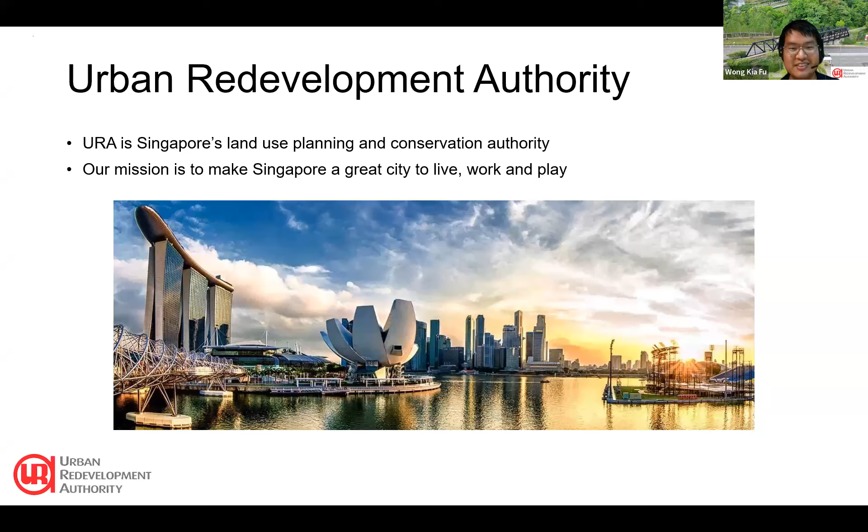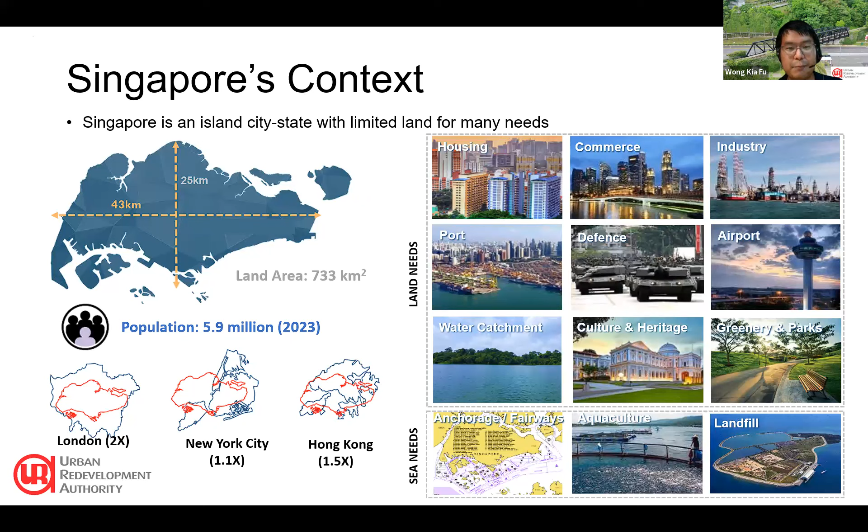Singapore is an island city-state with limited land for many needs. We have a population of about 5.9 million this year, within a land area of 733 kilometers square. We are half of London, and Hong Kong is about 1.5 times Singapore's land area. Within this very confined land area, we have to meet various needs as a city and as a country. Therefore, places like ports, defense, water catchment, greeneries, and so on all have to be considered in the limited land. We have to plan carefully and reuse and adapt different places to meet our needs as a country and as a city.

From the Development Services Group within URA, we are the engineering arm of the URA, where we plan, facilitate, and implement infrastructure, environmental improvement, and building projects for selected areas to facilitate URA's plans and vision for the city. Some of the more recent and well-known projects our team has completed are the district cooling system in Marina Bay, which has the world's largest underground district cooling network at the moment, the Helix Bridge and Marina Promenade, Kranji Marshes, and Marina South, just beside Gardens by the Bay, where we are starting to develop this place to serve our future needs.

We also do environmental improvement projects. For example, this one, where we upgrade an existing underpass to make it more friendly to people of different ages, avoiding the need to cross a pedestrian overhead bridge, so that it's more convenient, especially for people who are on wheelchairs and those who wish to cycle with undisrupted flow from different parks into the city area.

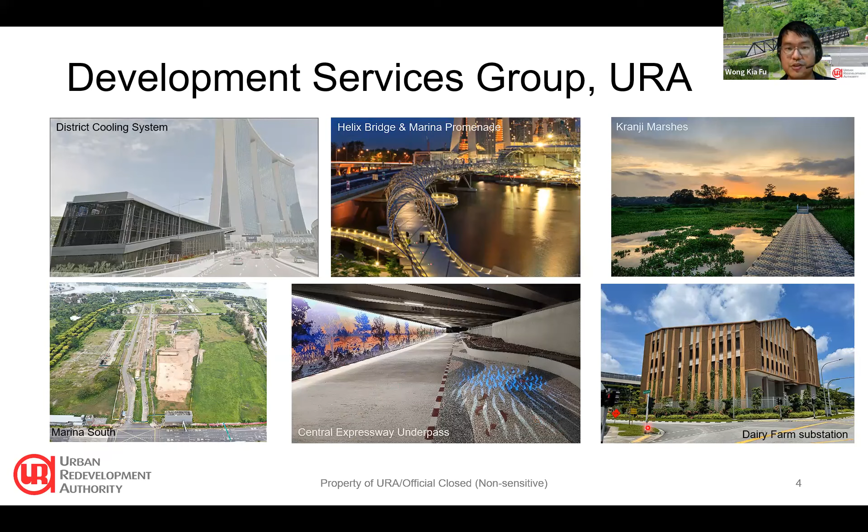And last but not least, as we develop new areas, we also work on preparing the infrastructure, for example, sewers, drainage, roads, as well as substations to serve the area.

So allow me to do a very brief introduction of the rail corridor and the railway history of Singapore. The alignment that you see here joins from Woodlands all the way to the Tanjong Pagar and Pasir Panjang area. This old alignment was the first Singapore Kranji railway line.

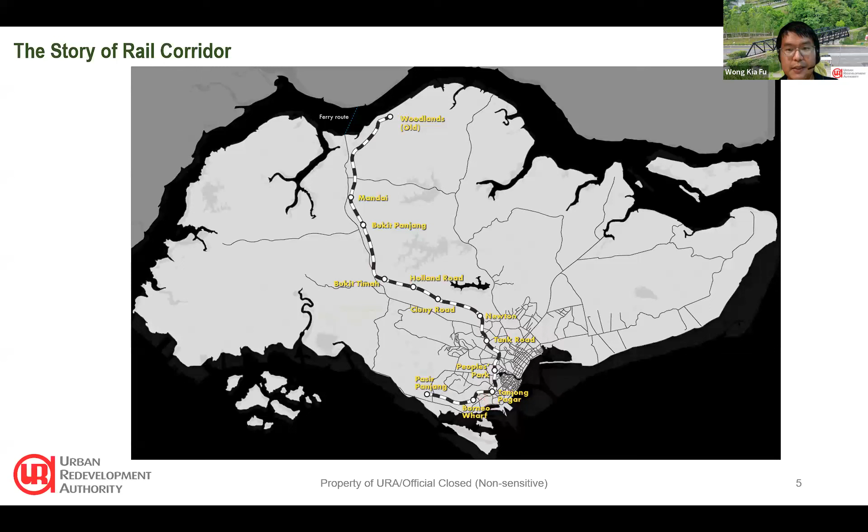This alignment, especially from Bukit Timah to Tanjong Pagar, was prone to flooding back then, and it was subsequently realigned in 1932. At the same period, due to the need to expand the main terminal in Singapore to cope with the influx of passenger and goods, the Tank Road station, which was the previous station, could not cope and could not be expanded due to space constraints. Therefore, we built a new Tanjong Pagar train station at this area.

This new alignment in green here has been in place since 1932. In this new alignment, we have a new Bukit Timah railway station, Alexandra Halt, Tanglin Halt, and as well as the last terminal station at Tanjong Pagar.

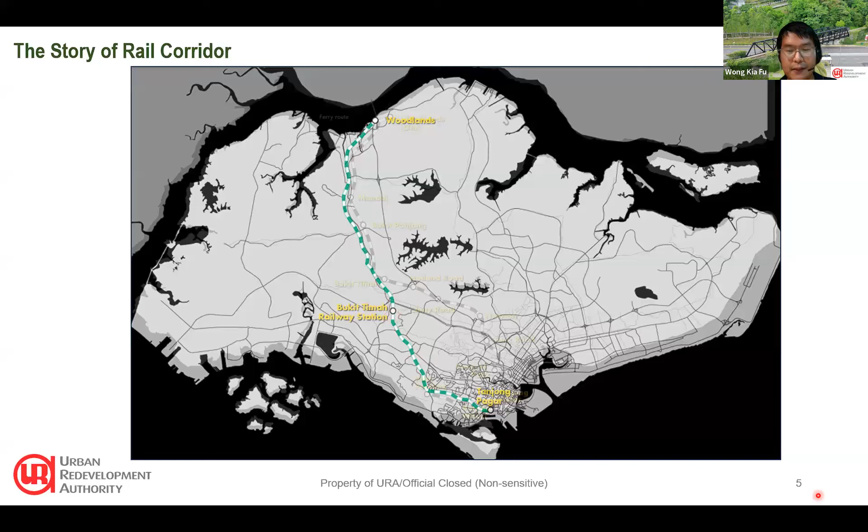So this stretch of rail corridor - again, this is the Singapore map - we are cutting across the exact center of Singapore. And the north here joins to Malaysia. We have the Kranji area here, and along this rail corridor is about 22 kilometers that goes all the way into the south, Tanjong Pagar.

We have about 1 million people living within 1 kilometer radius of this rail corridor. The corridor threads through various industrial estates and business parks, and there are also parks and open spaces around it. Within this 1 kilometer catchment, there are also 58 schools and various historical places or points of interest like the War Memorial, Old Ford Factory, the old fire station, and newer commercial areas like the Rail Mall, Bukit Timah, and so on.

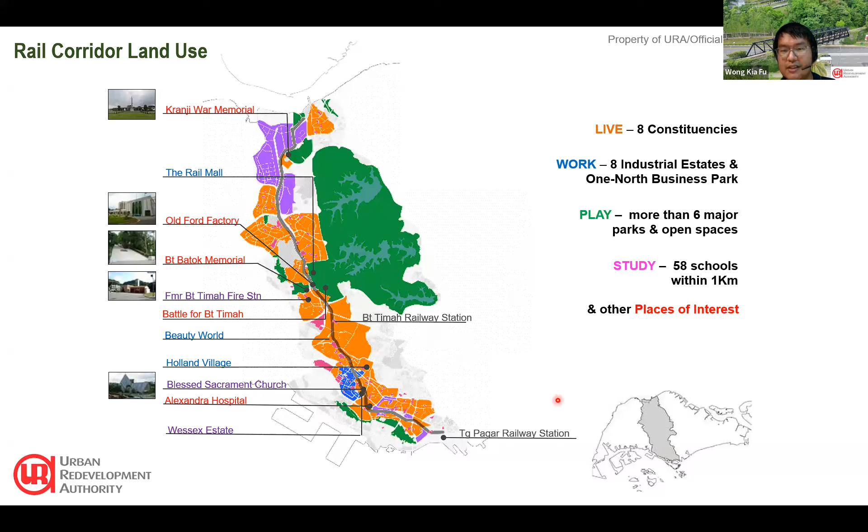So as we design and try to plan what to do with this rail corridor, we have a lot of stakeholders and communities that we have to engage and reach out to, and each of them actually have their own interests and aspirations. So as a developer looking after this project, we have to manage their expectations and aspirations.

When it was announced in 2010 - that was 13 years ago, right? - the railway operation from Singapore that connects to Malaysia would cease operation because we are shifting the railway out, and those areas from Woodlands all the way to Tanjong Pagar would stop operation. So Malaysia would return the land and the railway back to Singapore in exchange for some other items.

So when this land is freed up, it actually picks significant public interest on what do we do with this railway land or railway track that is returned to Singapore. The public response opened up an unprecedented opportunity for us to look at the future, how this place can be an enduring and special place for people to enjoy in different ways.

URA, as the planning authority, realized we need a public engagement, a proper public engagement strategy to put in place to respond to the residents' concern that the rail corridor, which has previously cut across the middle of Singapore, is a chance to join the community again.

Over the last 10 years, since 2010 until now, about 13 years, we have actually gone through 3 significant phases of the project. In the early 2010s, after the land was returned to Singapore, we launched a website about the project, and once the railway authority had salvaged and removed all the railway track, we opened the corridor to the public for them to just use it as-is.

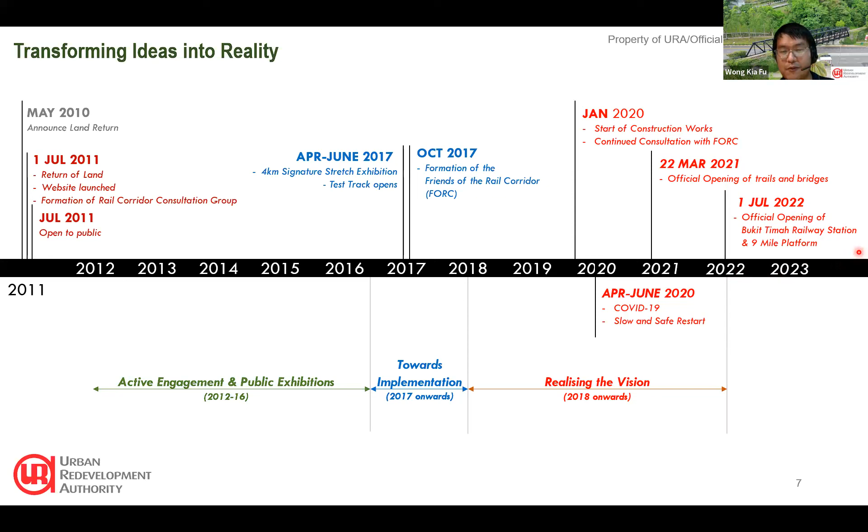We managed to open the project, reopen the bridges and the trail in 2021. Then in 2022, we opened the Bukit Timah railway station and the 9 Mile platform, along the same rail corridor central area, but developed as a separate project so we could open up the remaining trail earlier, while continuing construction of the railway station separately, as it will take a longer time and we did not want to hold back the public from using the space.

As we engaged the stakeholders, we received many ideas and distilled them into 3 key ideas. The stakeholders wanted to retain and increase the biodiversity around the area, wanted the place to be more accessible and inclusive, and wanted to celebrate our railway heritage. Most importantly, within these 3 bubbles, we wanted to keep this space large, and we didn't want to convert it into a modern area. We wanted to keep it as is today's condition, maintaining the look and feel of the project.

It's also important, as we engage various stakeholders, to know that their demands are not independent. There is always trade-off as we seek to strike a good balance between the different demands and requirements from the different stakeholders.

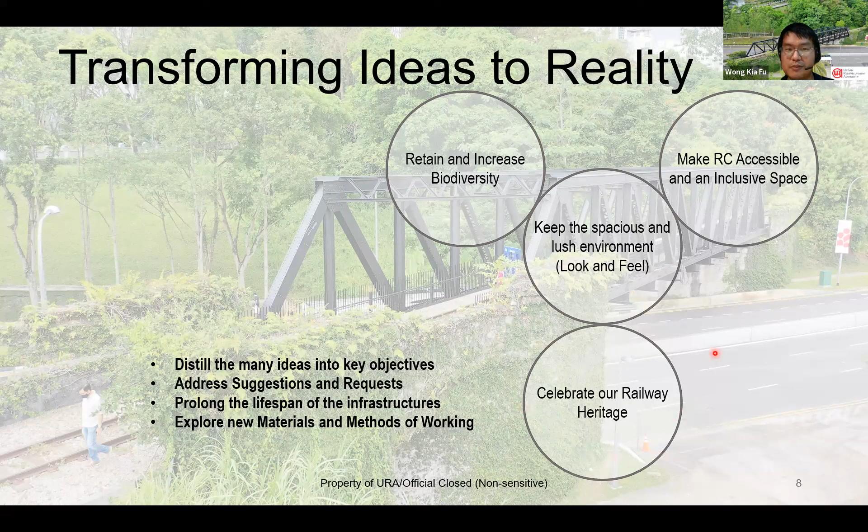Allow me to zoom into today's topic on the 2 bridges. We have 2 truss bridges along this rail corridor central. This is what we call Upper Bukit Timah Bridge, located above Upper Bukit Timah Road, and the other bridge is called Bukit Timah Bridge, located above Bukit Timah Road. The railway station I mentioned is over here, just next to the Bukit Timah Bridge.

So the presentation today, I will be focusing on the refurbishment of the bridges and the journey that we have gone through. To repair the bridge, there are 3 distinct steps. Firstly, we carried out a structural investigation. These bridges were built in the 1930s, so there are limited information and records of the materials, geometries, and design. We had to redo the structural investigation to establish all these parameters, then carry out design and analysis to make sure they are still safe to use in the future. Lastly, we carried out the actual refurbishment and enhancement work to the bridges.

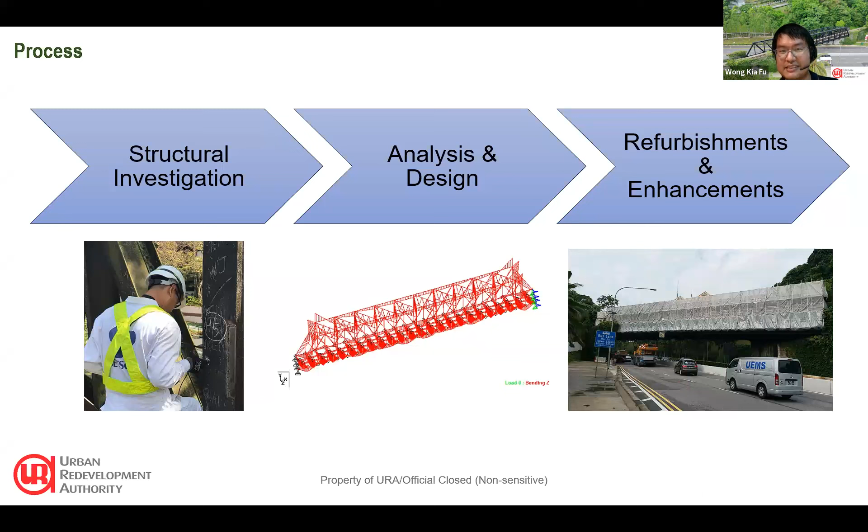As much as I try to explain and go through the steps here in chronological sequence, some of the activities that I will show later actually happen concurrently, so there may be pictures that you see come and go because I reuse them in different slides to show the intent.

Some key facts of the 2 bridges: the Upper Bukit Timah Bridge is 43.8 meters long and 6.2 meters high. The other one at Bukit Timah is a Baltimore Truss, slightly longer at 48 meters, about 5 meters longer, and also slightly taller at 6.65 meters high. They were designed by United Engineers Limited in Singapore in the 1930s and built by Dorman Long Co. in the same period.

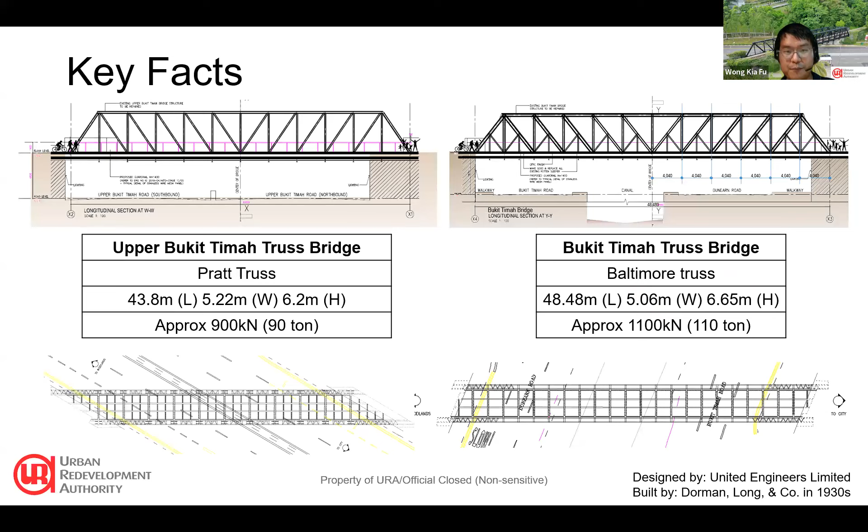Allow me to zoom into the first part of the process, which is to carry out the structural investigation. The consultant involved is CKMPT International Private Limited, a local Singapore firm. The engineer in charge is Engineer Abhishek Modi.

The key things we did were to establish the material sizes and geometry. Due to lack of records, there were no as-built drawings, so we carried out ultrasonic thickness measurement to establish some of the key member sizes and their thickness. We also used laser scanning to scan the whole bridge and reproduce the geometry drawing. These are all steel bridges, but we needed to know their chemical composition so we could identify the correct repair methods compatible with the steel.

The bridges were actually mild steel, built in the 1930s. We thought they were cast iron material, but after doing the test, they turned out to be mild steel. Since they are mild steel, we can use welding to do repair work, instead of cast iron, where the material is brittle and we cannot use welding. So all this influenced how we repair and refurbish the bridge later.

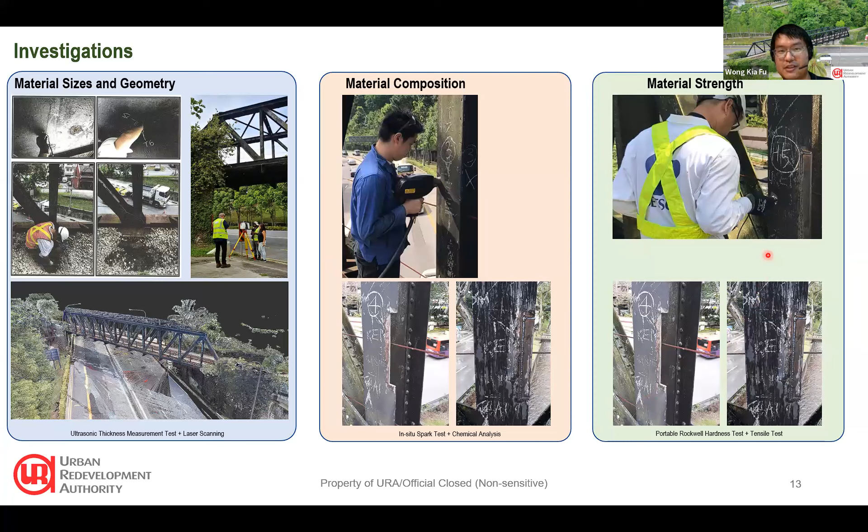We also retrieved some pieces and used destructive tests and non-destructive tests to identify the material strength, which helped to establish the design capacity of the bridge.

So we have considered the various loading in respect to the Singapore National Annex requirements. There will be dead load and superimposed dead load, which are the ballast, sleepers, and rail. They are quite thick, about 400mm thick of ballast on the bridge. Live loading, wind load, collision load, which we have to consider based on our local transport authority requirement.

Because this bridge is just about 4 meters above the road level, we do have to consider double-decker buses or other vehicles, especially trucks, in case they exceed the allowable size and hit the bridge. The bridge needs to remain stable and safe.

We also consider a corrosion allowance of 1mm. As much as possible, we carried out ultrasonic tests to check the thickness, but it's not possible to check the entire bridge. So we checked a few key areas and allowed 1mm reduction when we do the design check. Based on the different tests we carried out, we established that the yield stress is actually 235 Newton per mm square.

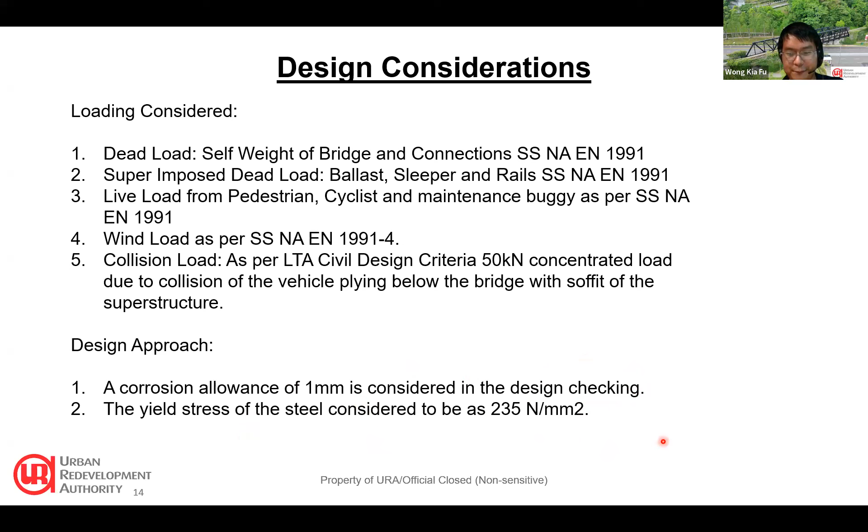Then, with the help of 3D laser scanning, we managed to rebuild the bridge geometry. With the geometry, the engineers modeled it in software to carry out structural analysis. Using the load cases I explained earlier, we established that this bridge is safe to use by the public in the future.

We are currently allowing people to walk and cycle on it. We are not allowing vehicles, and the analysis has shown this is sufficient for this use. We also, importantly, looked at vibration analysis, but this bridge being very stiff and quite heavy because of the ballast weight, we have no concern on the vibration and frequency of the bridge.

One concern we had earlier was also on fatigue, because it has been used by trains over a long time, since the 1930s. But we tracked back the timetable and schedule of the trains back then, and established that the bridge was designed for 2 million train loading cycles. Calculating backwards from the 1930s until 2010, there were likely only about 500,000 cycles of loading. So we are still far away from the design life of 2 million cycles.

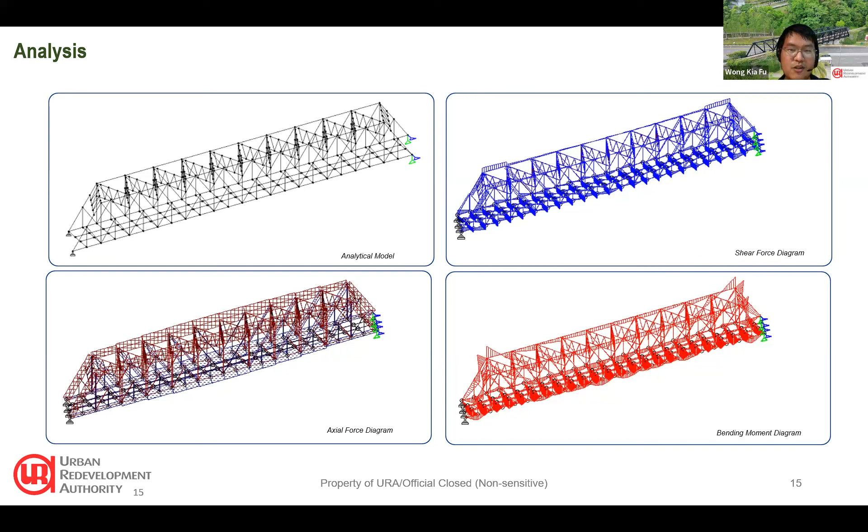So in terms of fatigue, the bridge is also in good condition, and we do not have to be worried about that. On visual inspection, we established there were no fatigue issues and everything was in good condition. So what we need to do is carry out local repairs for those members that have rusted or broken over time.

With the investigation completed and key engineering parameters established, we then moved on to do more detailed documentation. The contractor was Tangs Engineering Private Limited, and the survey was done by Jimmy Tan, registered surveyor. So we made use of laser scanning solutions.

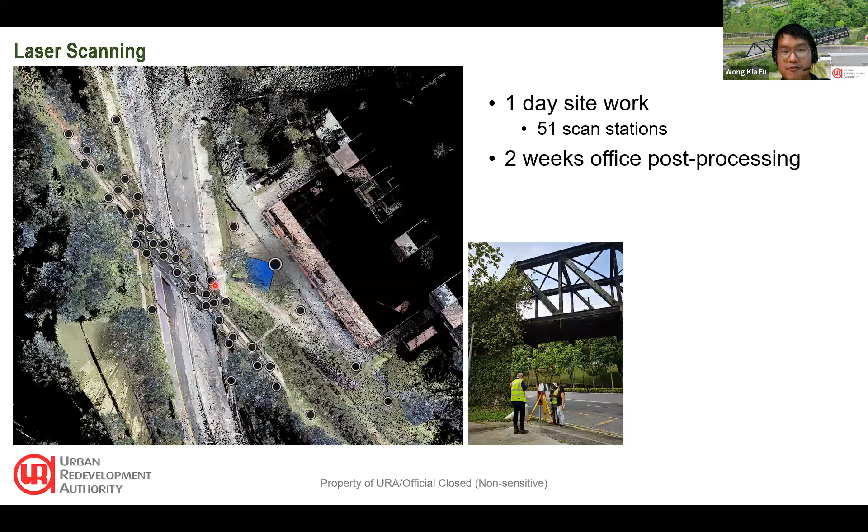We spent just 1 day on site, and completed 51 scan stations, some below the bridge, some on top of it, and some at the site. After about 2 weeks of office processing, we could then reproduce the drawings and structural details, including the number of rivets at each location, with very good accuracy.

We also noted that at places like the lacing at the bottom chord, some had been corroded, and we were able to track and capture all of this in the drawing. This will facilitate the engineers' further proposal on design and refurbishment.

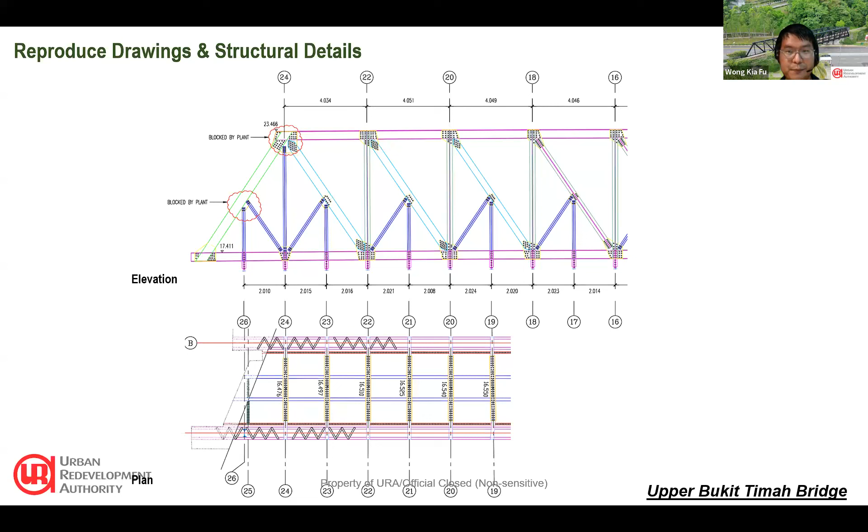And we can only close it at night. Therefore, having a good and accurate reflected ceiling plan allows us to plan the lane closure and traffic arrangement very safely and carefully. We can then overlay both, and at the same time, there are also other contractors doing other works nearby, and this allows us to interface and make sure we don't overlap with one another, so we can repair the bridge with minimal disruption to motorists who have to use the road below.

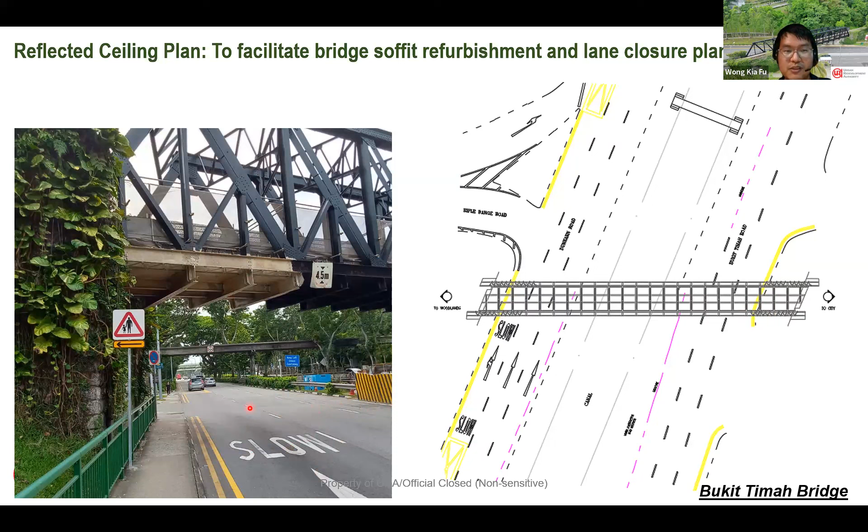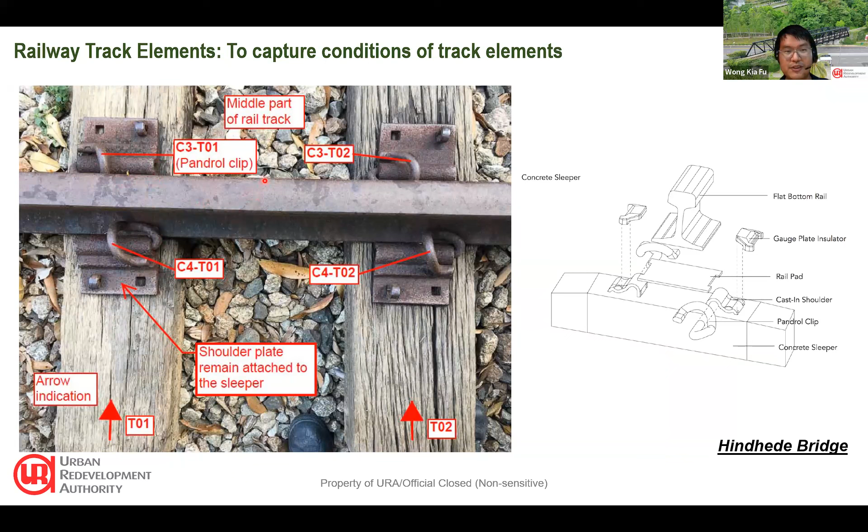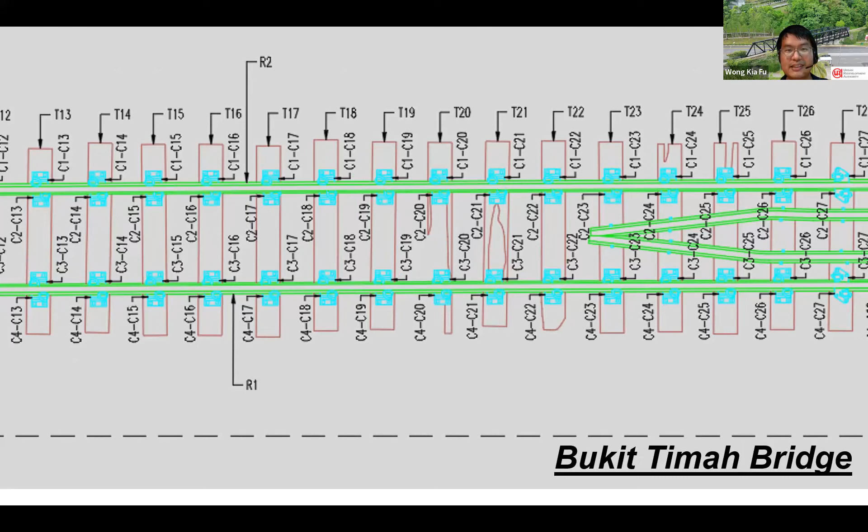We managed to also reproduce the track element in CAD, and you can see we can detect very small curvature and bends, which is hard to do if you were just using conventional total station surveying. We can track the elevations, the 3D and XYZ elevations, of all the end members of the railway track. If I zoom in, you can see the track elements, some of the sleepers have rotted. We are also able to pick this up from the survey, and we know exactly which member, T20, T21, has a problem with the sleeper.

So after this documentation, we then move on to do the actual refurbishment work. The contractor is Tangs Engineering, and the qualified engineer works on it. The design scheme is by engineer Dong Weibin.

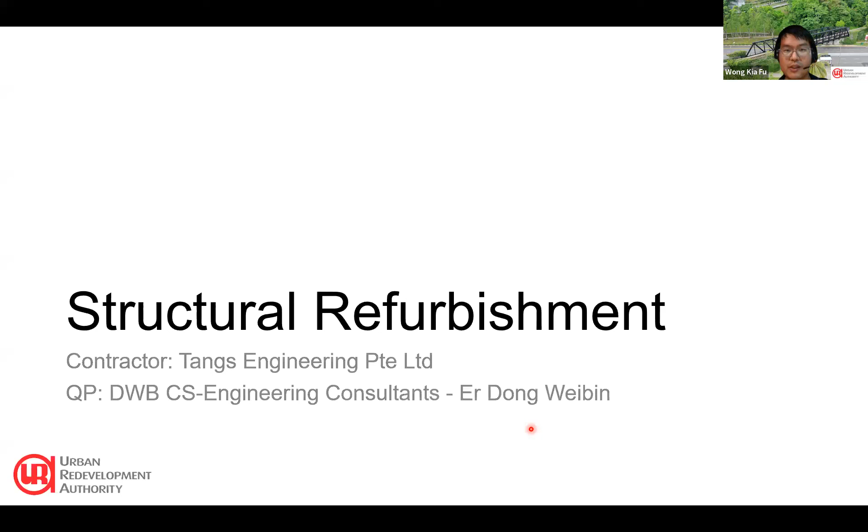Before we can do anything, we have to think about how to allow the workers to go up and repair the different levels of this truss bridge. This truss bridge is about 6 meters plus high, as I shared earlier. So we made it into 3 levels so that we can work on different levels at any one time.

The standard size of scaffolding pipe in Singapore is 6 meters long, and although the truss bridge is 6 meters high, they actually have diagonal members. So dealing with a 6 meter long steel pipe above live traffic is something we wanted to make sure is safe. We don't drop any items, and the workers can handle the pipes safely.

So we use the 3D model based on the data we collected. We then review this model and simulated how the erection sequence of the scaffolding pipe would be, and in some locations we identified that a 6 meter pipe is too long. We have to cut it into 2 pieces of 3 meters each, and then erect them accordingly.

With this, we worked up a sequence of about 44 steps, step by step, on which pipe to erect first, until the very last step where we put a wrap across it so that we can work within the bridge and not disturb the traffic below.

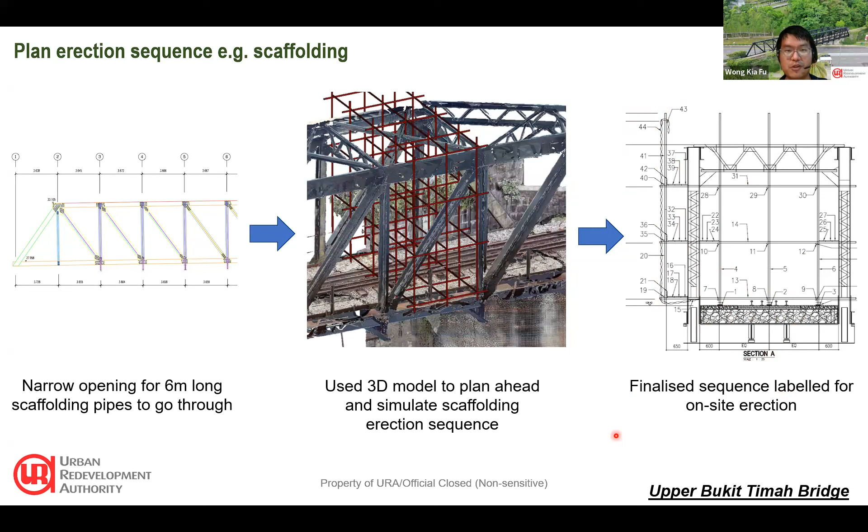So all this is carried out with live traffic below. We make sure safety is a critical concern here, and we managed to do it without any disruption to the traffic below and without any incident. This is how it looks at the bridge level, where the pipes are done, 2 levels long, and at the end the whole bridge is wrapped up and people work on it while cars and the road remain open underneath the bridge.

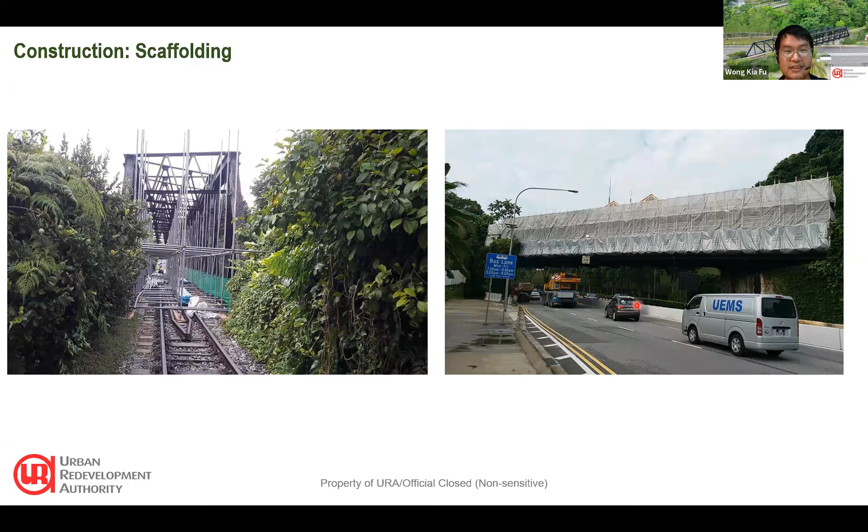So when the scaffolding pipe is up, we have a working platform on top of it, and we can then start doing the repair work. One of the things we have to do is apply protective paint onto the structure. We first have to grind off the existing rust on the bridge, then apply 4 coats of paint - first 1 primer, then 3 coats of painting. All these are corrosion and weather resistant paint, and in the end it looks like this in the photo.

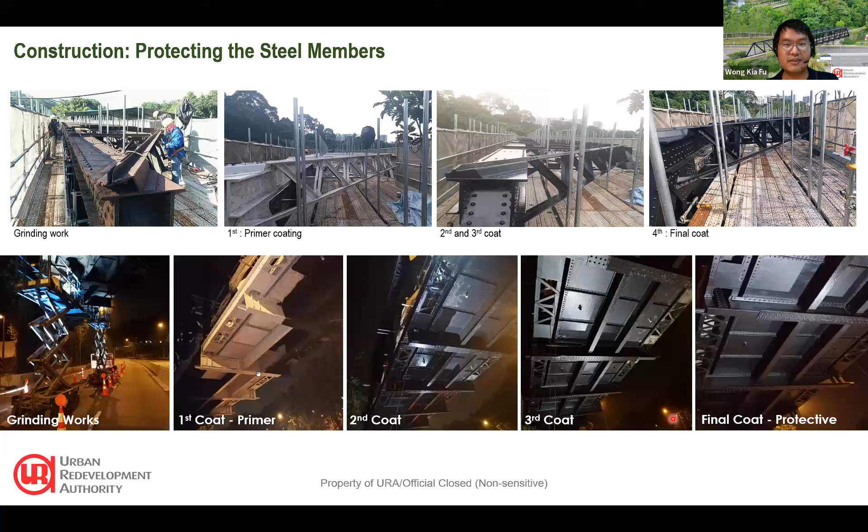This is what happened on top of the bridge, and at the bottom of the bridge we do the same thing. We have to close the road. You can see we put safety cones, and we have the scissor lift to bring people up to repair the bottom. Because of these four stages of coating, including repair work if needed, each lane takes about one week to do. So we grind and then paint lane by lane, and then move on to the next lane.

This is at locations where there is damage at the bottom steel member. They are likely damaged by an oversized vehicle that hit the structure previously. You can see the members are bent. So we carry out one-to-one replacement of this steel member because we cannot fix it on the spot. We have to cut it and weld a new member back so that it can still carry the weight of the bridge. This is also done concurrently as we do the painting work underneath the bridge.

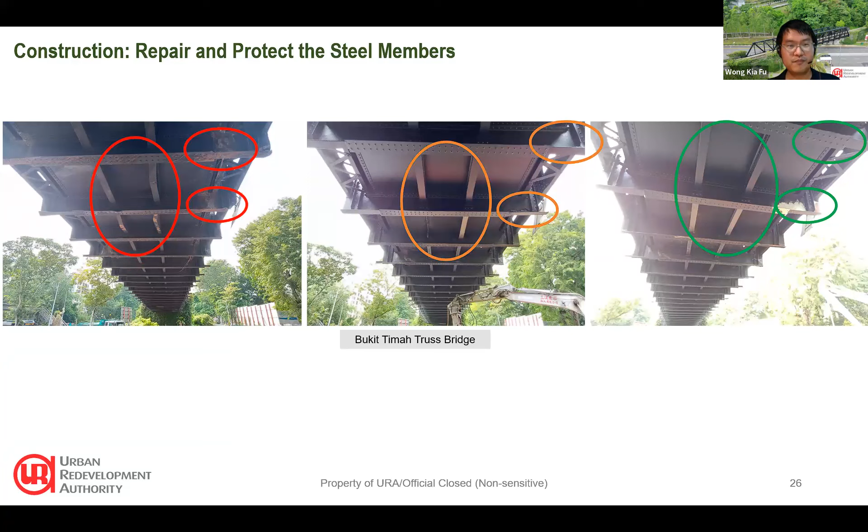On top of the bridge, we have to also check the steel decking. Once we opened up, we saw there were gaps cut for various reasons, and holes previously used for drainage that we no longer need. So we welded plates to cover them and provide enough protection over these damaged plates so that load transfer is sufficient to pass to the bigger plate member.

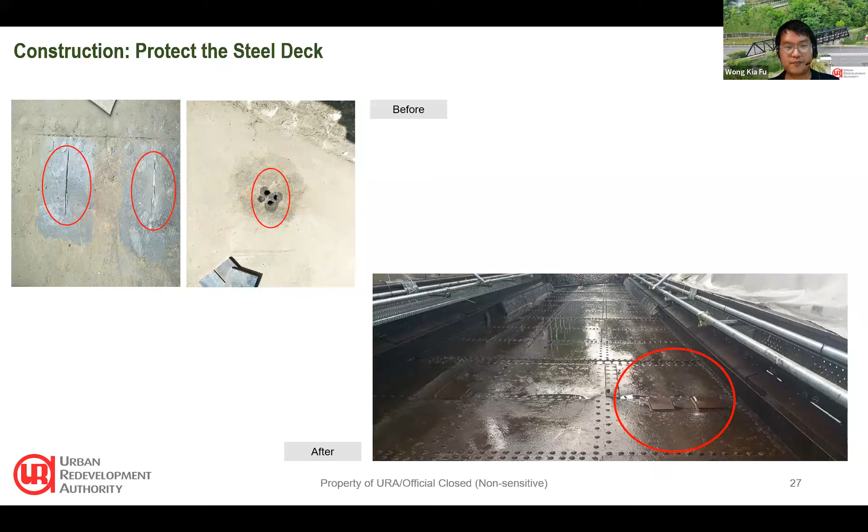Actually, it's quite exposed. So if you're walking on it and playing with your phone, you may drop your phone and it will just fall to the road below. So it's dangerous, and the height is only 1.05 meters. As we do the refurbishment, we wanted to address this safety concern, which the public has also been highlighting.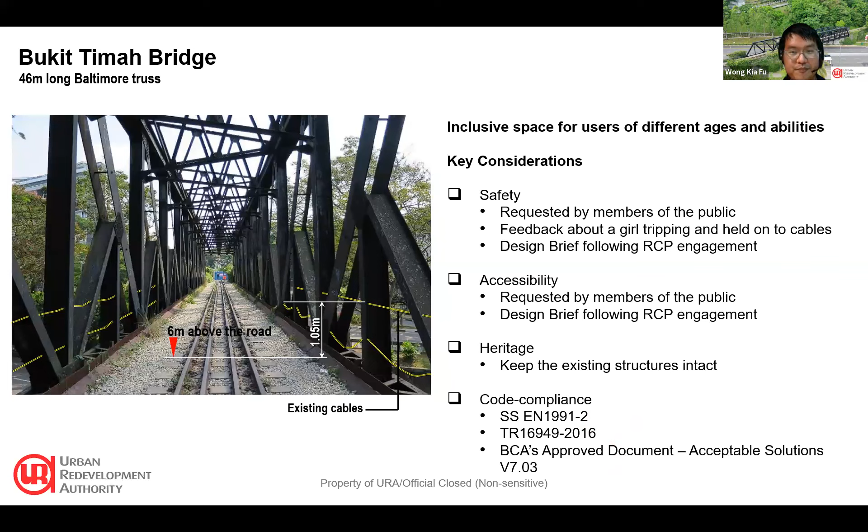Because we allow people to use bicycles on the cycling bridge, we have to make sure the railing is high enough so that people, when cycling or standing on the bicycle, will not topple and fall out from the bridge. So the railing used on the bridge eventually is 1.4 meters high, which is an acceptable standard for bridges that allow cycling.

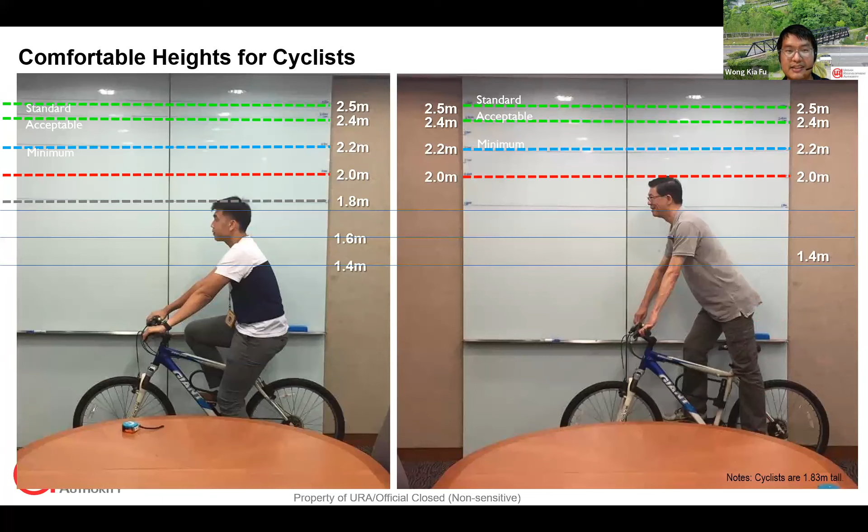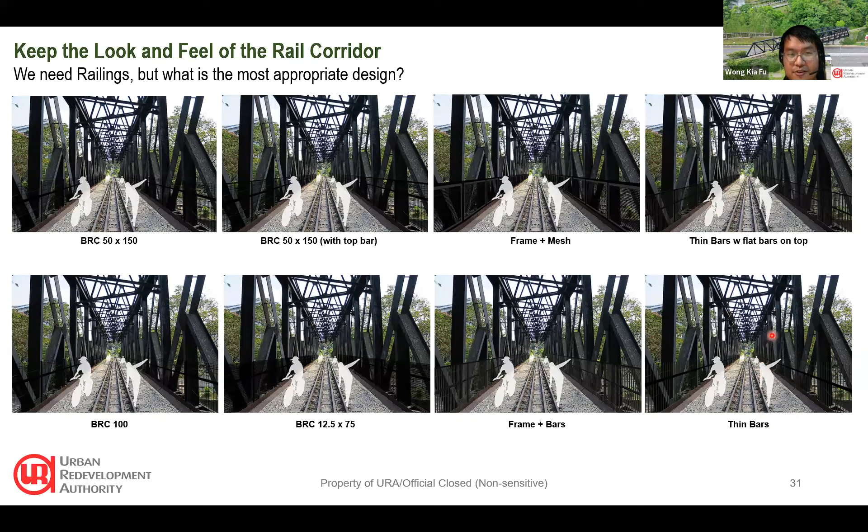After that, we fabricated some mock-ups and brought them to site, and brought the stakeholders to the bridge again to have a look and get their comments and feedback on whether they like the design, and whether there's any further improvement that can be done.

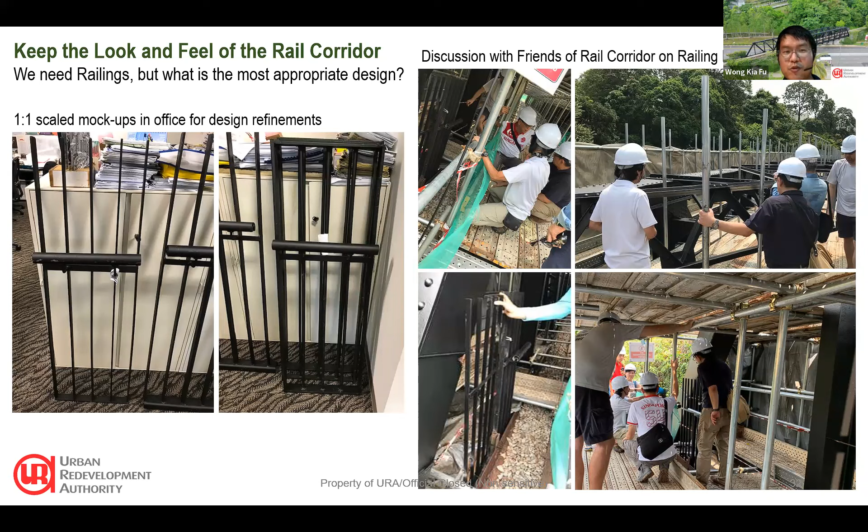We also pushed the boundary of the design code to make sure our steel railing is structurally adequate, but slim enough that it does not affect the look of the bridge, especially when on top or when viewed from the road level, which is slightly lower. We want the truss bridge to still remain the key language and character of the bridge, and not be overpowered by these new railing members.

On the flooring, we wanted to make this bridge more accessible and inclusive. This includes people with prams, baby prams, or wheelchairs. What is the most appropriate material to achieve this?

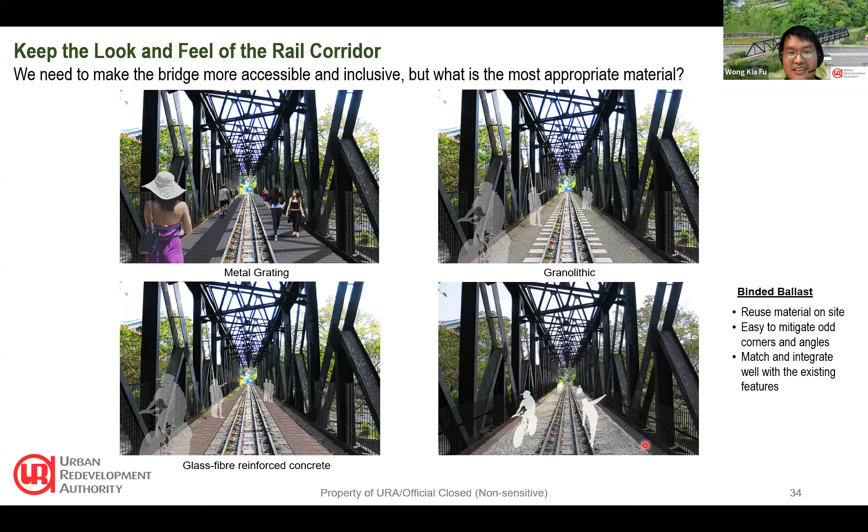This is also good because we reuse the existing ballast on site. They were loose, individual aggregate stones, and we used cement and grout to bind them together. This is an easy way to also mitigate odd corners and angles because of the bridge abutment - there are some corners that are tricky to handle. Using this bound ballast method, we can also match well with the existing surface because it feels like we have not done anything, and that was what we wanted to achieve.

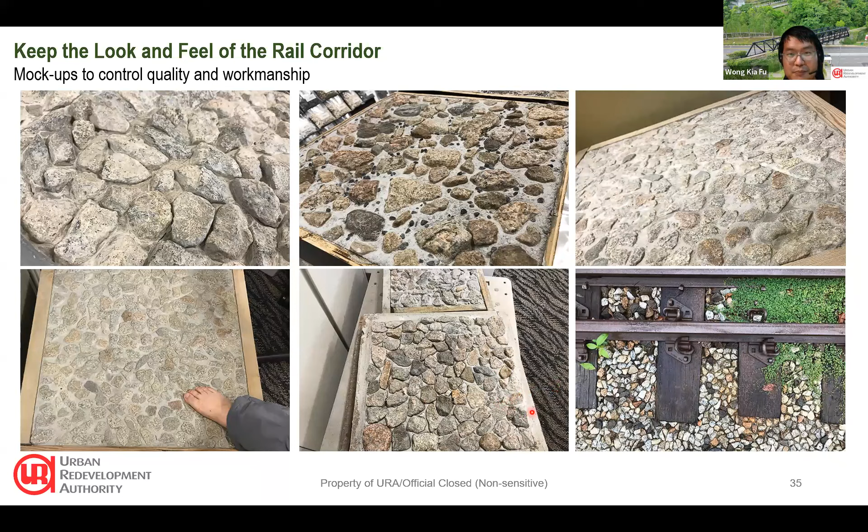So we tried different methods and different binding with different gaps and so on, to ensure quality and workmanship. This was the various mock-ups that we did, and we were able to achieve something very close to it when we did it on site.

And how do we do this binded ballast? Let me share the key sequences. We first have to set up a metal frame to hoist the lift track up, and then we remove the sleepers, take them and put them aside. Then remove the ballast stones from the bridge.

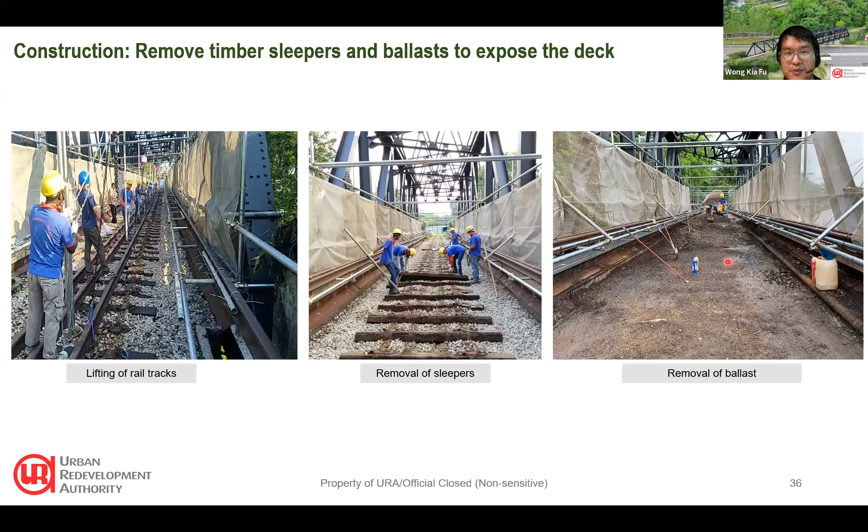With this removed, we then measured the levels again and found that this bridge is actually constructed with about 300 to 400 mm level difference at the two ends. So naturally, if water manages to come down to this deck level, it can flow and drain naturally to the other side of the bridge.

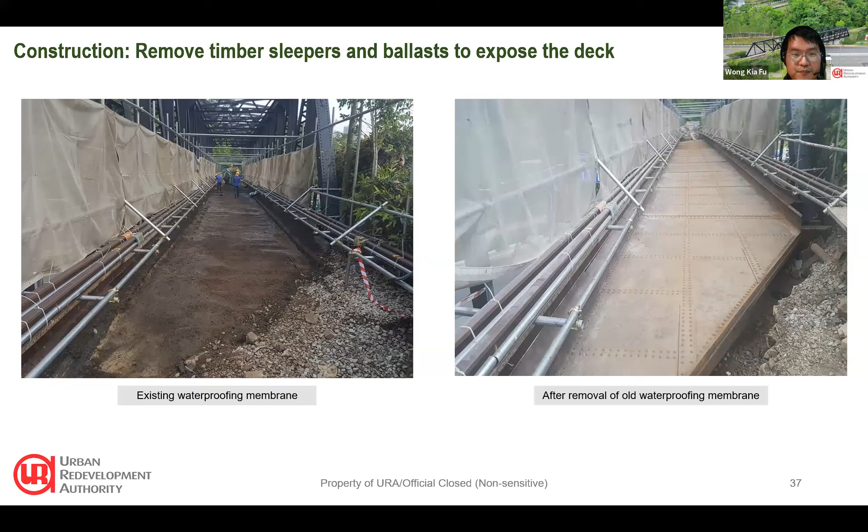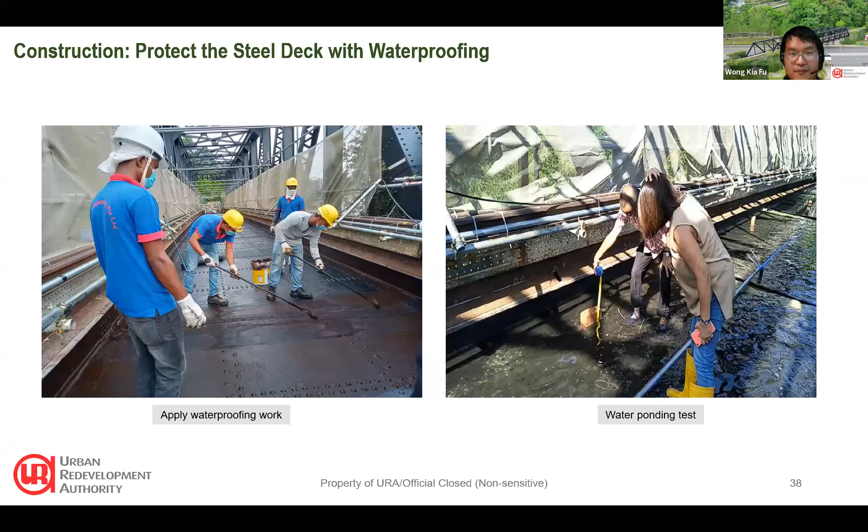To protect the steel deck, we apply waterproofing, several coats of it, and carry out water ponding tests to make sure water does not and cannot seep through the steel deck. After satisfying that, we proceed to apply screeding to protect the waterproof membrane.

At both sides of the bridge, we introduce a subsoil pipe. This facilitates drainage even quicker, so that when water comes to the lower side of the bridge, it can flow into this pipe and drain off directly to the side.

We then backfill the ballast to help create a stable ground. We use precast concrete planks to form the base of the ballast, and then top it up. We bring back the ballast aggregates and check the levels to make sure they are in the right position.

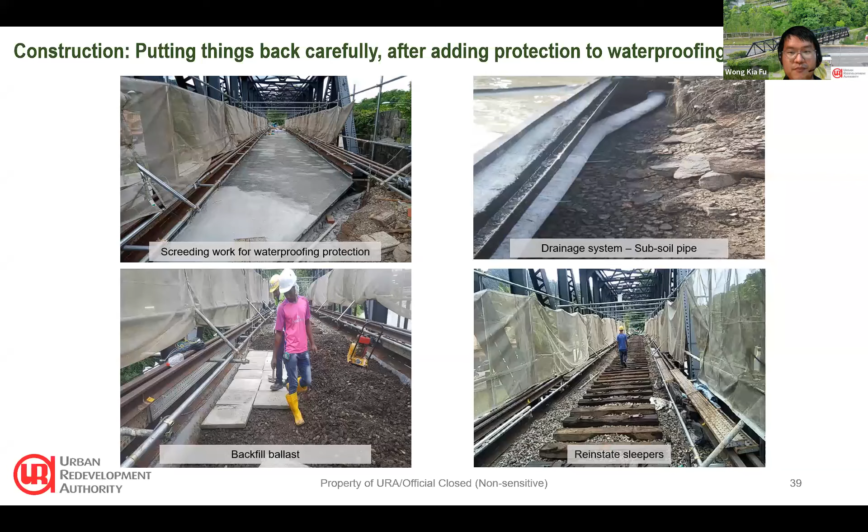We then reinstate the sleepers, bringing them back. At the end, we reinstate the railway track again with proper control to make sure they go back to the same place. After that, the railing work starts. As we do all this concurrently, we then start to use the binded ballast method to bind the stones.

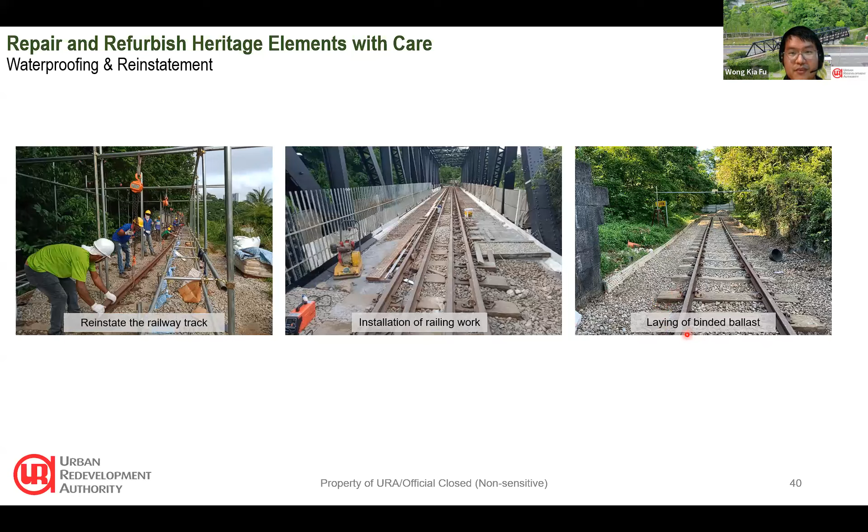So how does it look like at the end? This photo is the eventual product of the project. They look the same from the photo, but actually both sides are about 1.2 meters wide, which is sufficient width for wheelchair users.

The stones here are all bound by cement grout. So this left side and this right side are binded, making it very stable to work on. But in the middle segment, we leave it as is, so you will see loose ballast here. If you wanted to try working on railway track ballast, you can work on it and enjoy the feel of the loose stones.

And again, this is another view. At the end, from far away, you really cannot tell the difference between the binded ballast and the loose ballast.

We also carried out at the same time some enhancement work on the project. Previously, the bridge had no proper access, because this was the old railway track, and it was intentional that we didn't want people to come onto the track—it was a safety concern. But now that this has opened, people have been climbing steep slopes just to come to this bridge, and they can walk and jog since we opened it in 2011.

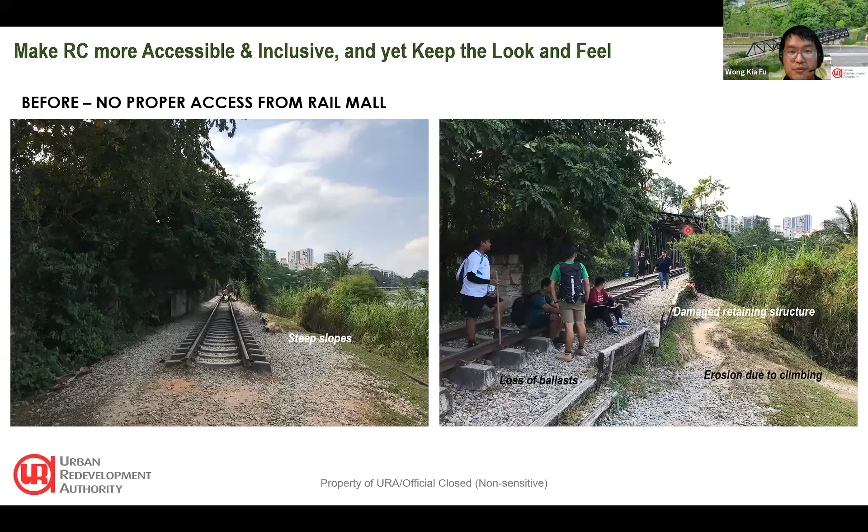But it's a good time to make a proper access to the bridge so that it's more accessible. Since then, we created a new access from a building called Rail Mall just to the south here. People can now go up properly with proper steps and come to the bridge to start their Rail Corridor trail. Towards the right is the north, and towards the left in the photo is the south.

This garden steps that we created, zoomed in here, is inspired by the timber sleeper. We tried to replicate the sleeper feel, but these are actually concrete material—glass fiber concrete—patterned to look like the sleeper. So it can last longer and be more durable compared to a timber sleeper, while offering the same look and feel.

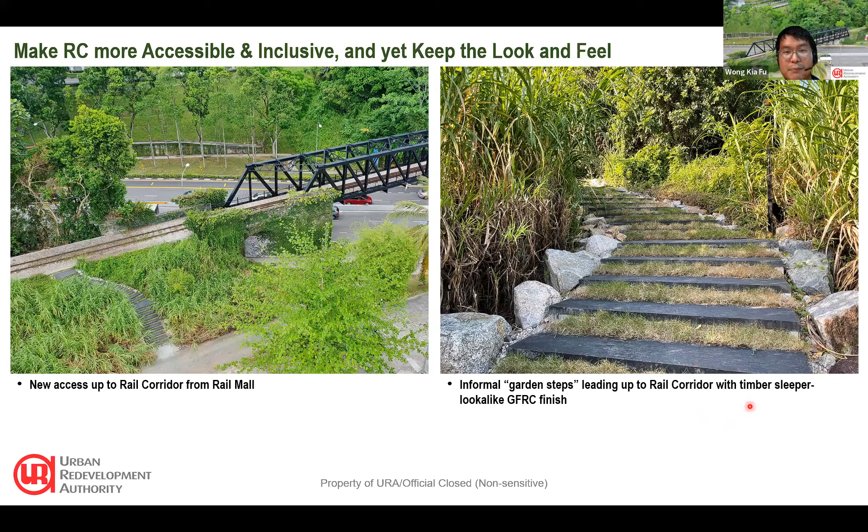And last but not least, we also introduced lighting because in the old bridge there was no lighting. We simulated several mock-ups with a squarish and rectangle shape trunking or pipe trunking, tested on site, and compared. In the end, the linear structure was adopted because we thought it blends better with the steel truss frames.

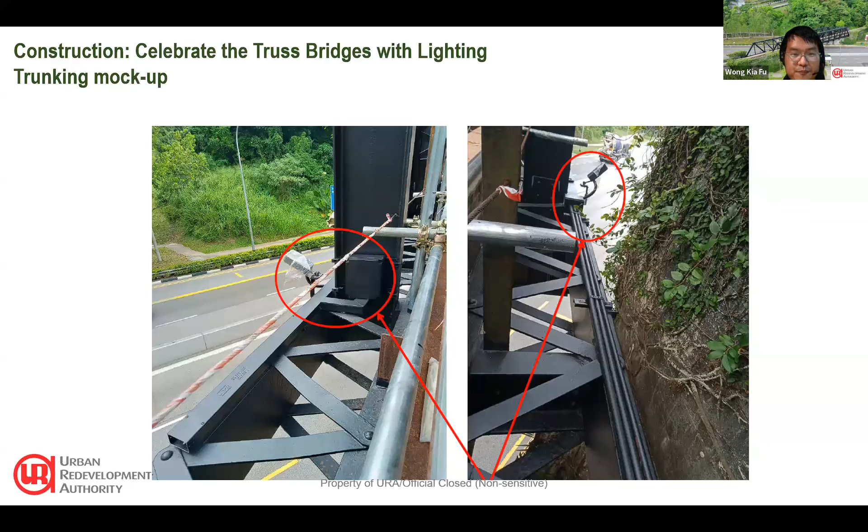We installed several lights on the bridge. There are lights on the outside that shine and show the vertical, horizontal, and diagonal truss members. Those are RGB color lights, so you can change color to suit different occasions.

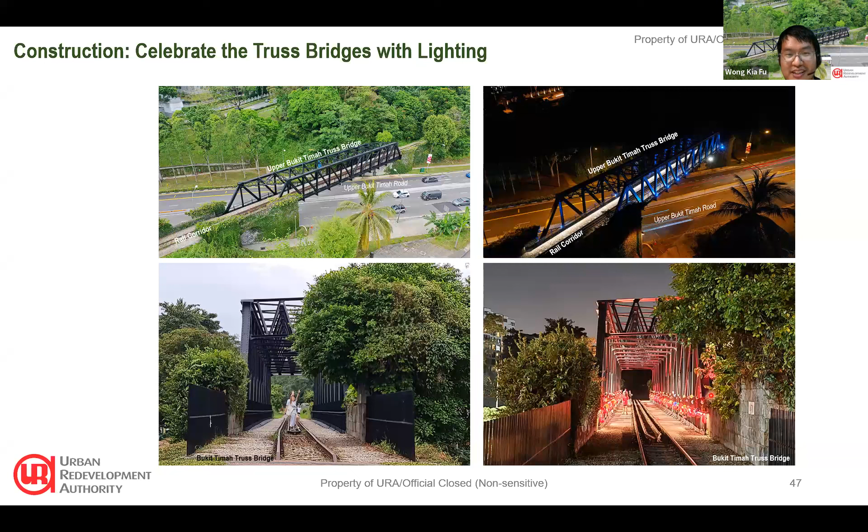Within the bridge, at the bridge level, we installed strip light LED lighting within the handrail. This forms a very nice linear light that shines on the floor to make sure you don't trip on top of the bridge. At different occasions, this was taken around Chinese New Year in 2021, so the community celebrated this.

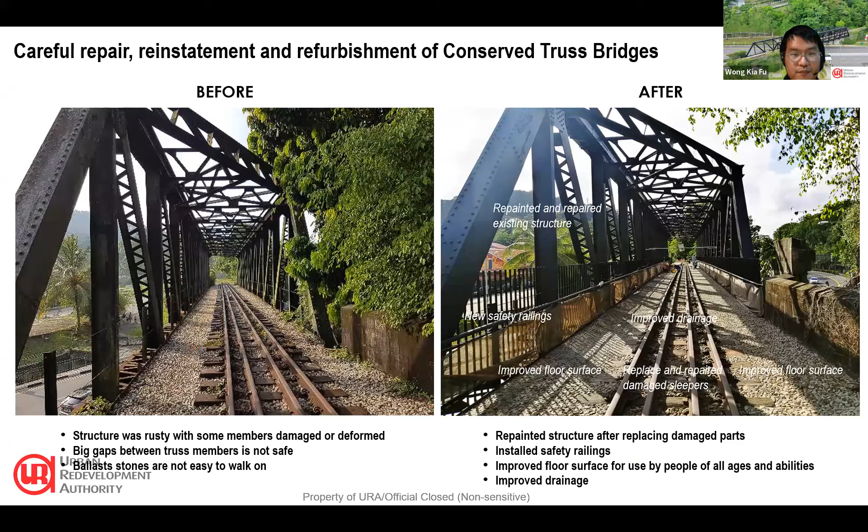What we did was carefully repair, reinstate, and refurbish the truss bridges. Upper Bukit Timah and Bukit Timah both went through exactly the same process, just at different locations. Previously, the structure was rusty with some corroded or damaged members, there were gaps between them, it was easy to trip and fall on the bridge, and there were no safety railings. We came in, repainted and repaired the structures, installed safety railing, improved the floor surfaces and the drainage on top of the bridge. So then we opened this to the public for them to enjoy.

On 22nd of March 2021, we opened this place to the public, around the Chinese New Year period, where the community started putting in recycling things - some bottles, some flower decorations on the bridge - and people came and enjoyed this place together as a community.

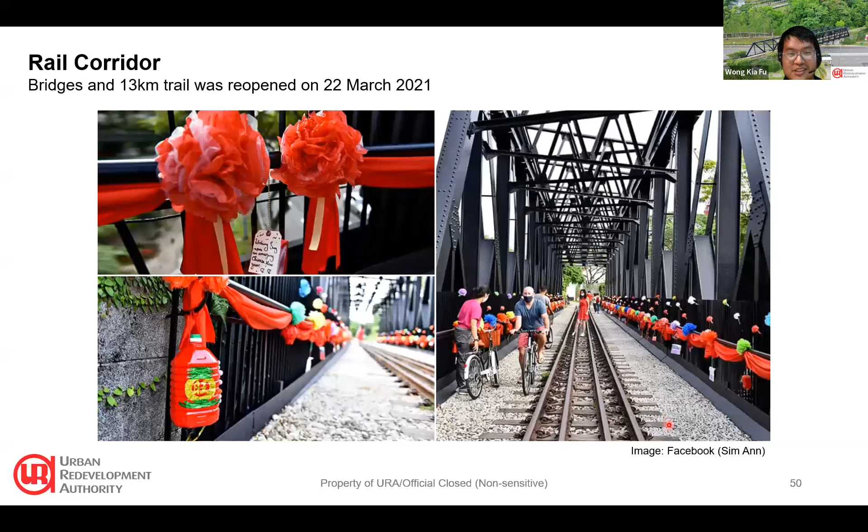At the same day, we opened the trail as well. As shown in the earlier map, these two bridges are the north and south of the central trail area. We opened the trail at the same time, and people - you can see wheelchair users, cyclists, people with prams - enjoy using the space together and this new area that they now have access to.

There was overwhelming interest when we just opened the place. It got really crowded over the weekends in the few weeks immediately after March 2021. Today the situation is much better, but generally over the weekend or public holidays we still see a lot of people come to the Rail Corridor to enjoy the place with their families and friends.

And with this, that's all for my presentation. I hope I managed to share with you some of the experience we've gone through for the Rail Corridor truss bridges in Singapore. Thank you so much.

Thank you, Kia Fu, for bringing us through in great detail the restoration of two of these critical landmarks in the center of Singapore. For those of you not from Singapore, these two truss bridges are how many people mark the distance going up the trunk road of Bukit Timah - imagine the M1 up from London to the north, there are some landmarks, and these two bridges from 1932 are those landmarks. For a long time, as a planning authority, we struggled with whether we could keep these two for reuse because of the competing concerns of traffic management of the trunk roads below. Luckily, we were able to rethink our entire planning approach to not prioritize road growth or traffic growth, and this allowed us to rethink the retaining of these two bridges.

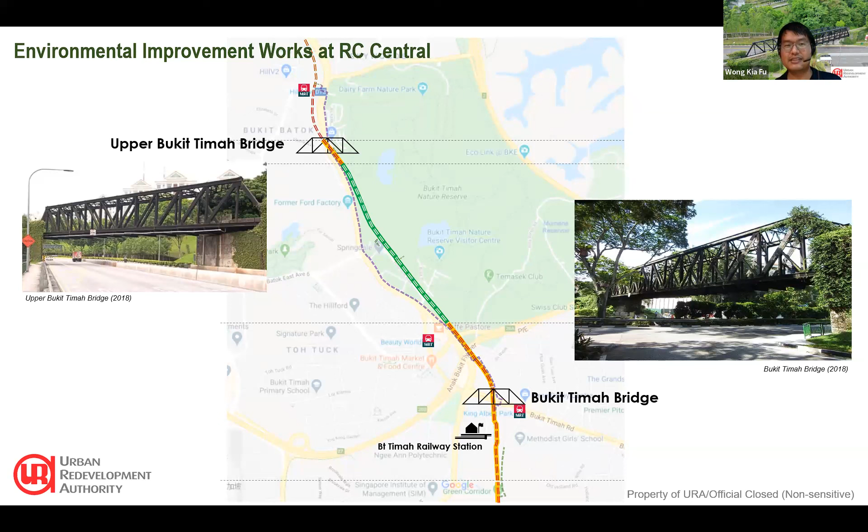How often will this bridge be checked? In Singapore we have a typical inspection regime called periodic structural inspection. Most buildings in Singapore are checked every 5 years, as required by the Building and Construction Authority, where building owners engage qualified engineers to carry out visual checks for structural defects. The engineers then recommend repairs or further investigation if required. So these bridges will be checked every 5 years by our Parks colleagues.

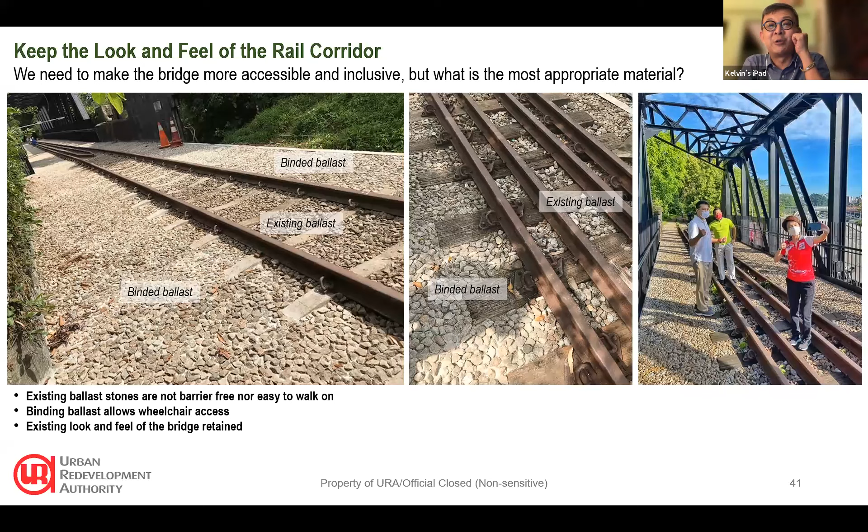Well, you don't have to give me an answer now, but if you do, drop us a line. I think we are quite interested.

Kelvin, have you contacted the National Railway Museum at York at all? Because they might have the civil engineering material in their archives.

No, we have not, but thanks for that. I think we can definitely make a connection even after the current stage, because it will be useful reference for future works.

I'd just like to take this opportunity to congratulate you on an excellent job. I lived in Singapore for 2 years and remember these bridges. I actually lived next to the railway line near Wessex Estate.